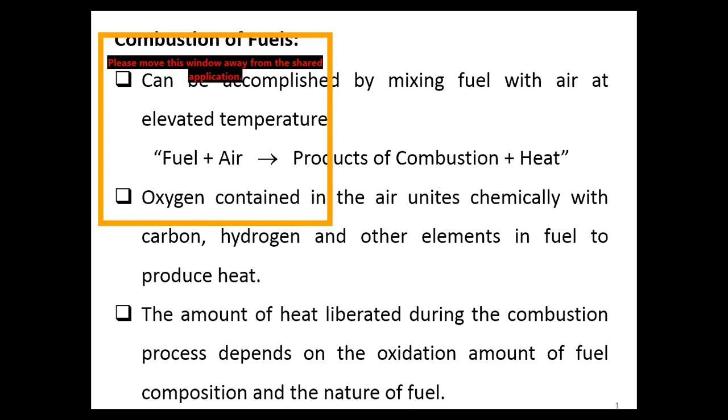You can see the orange frame happen. Okay, stop sharing first, then share it again.

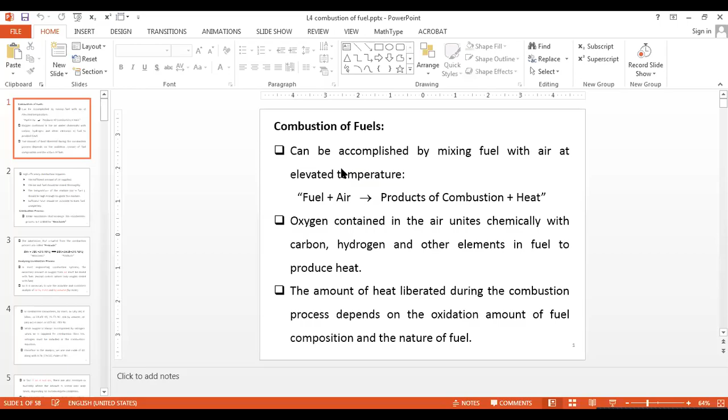Okay, so today we are going to talk about the combustion of fuels, which is the main source of energy for our internal combustion engine. Combustion of the fuel creates the heat for us.

Combustion of fuels can be accomplished by mixing the fuel with the air at high temperatures. So when we have fuels and air both at elevated temperatures, the reaction will happen, and that means we will have the product of combustion and also the heat that comes out. This heat will convert into work for us.

So why does this reaction happen? Because we have oxygens. The oxygen contained in the air will unite chemically or react chemically with the carbons, hydrogens, and other elements in the fuel that we mix with the air. So it produces the heat.

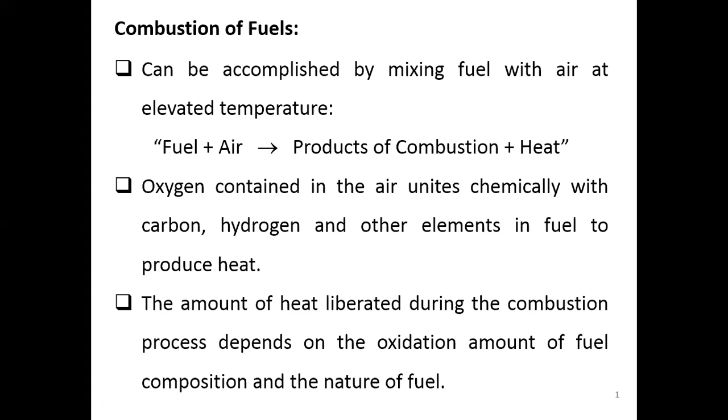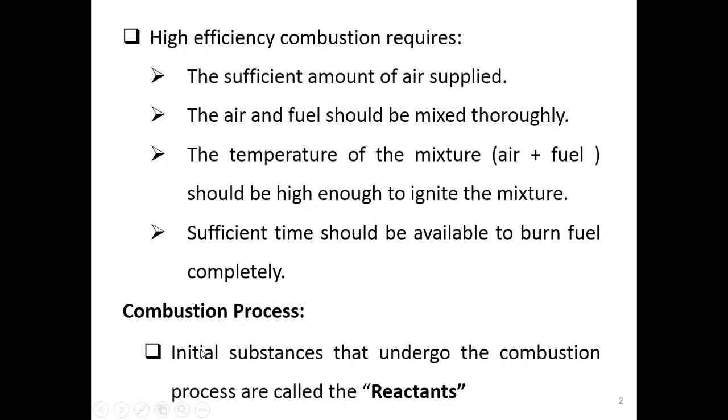Okay, so let's get into the combustion process. Anything that we put into the combustion first, before it goes into the combustion, we call that the reactants. So the initial substances that undergo the combustion are all called reactants. And anything that comes out from the combustion after it finishes, we call it the products.

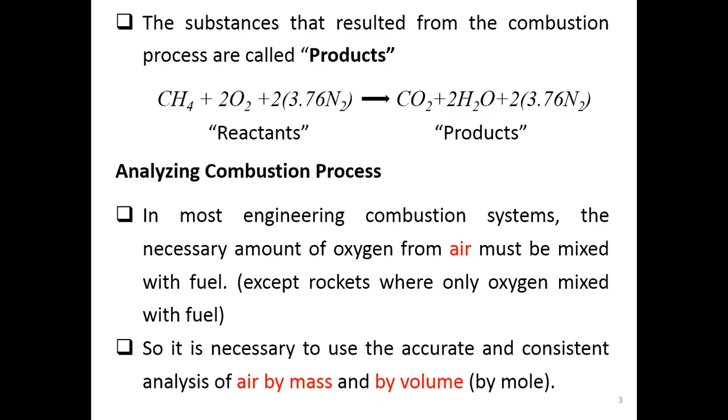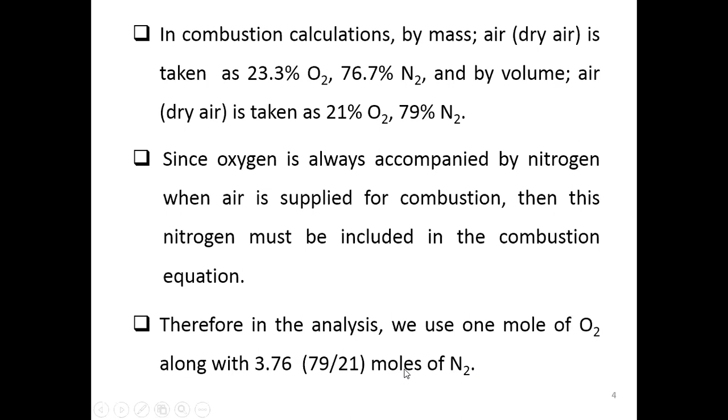Since we bring air into our combustion, not only oxygen do we have to take a look at — since air contains oxygen and nitrogen, we have to take nitrogen into our combustion equation as well, even though we know nitrogen is an inert gas. In the analysis, as already mentioned, 1 mole of oxygen will go along with 3.76 mole of nitrogen, and this represents the air.

We can know the amount of moisture or humidity in the air by using what? Does any student know? In order to get the amount of moisture and humidity in the air, we can use what kind of chart? You learned it in thermodynamics, in the mixtures chapter — what chart can we use in order to get the amount of moisture and humidity? Does any student know?

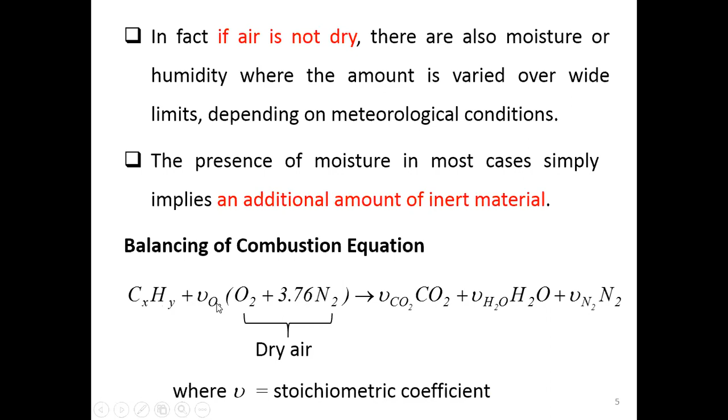Okay, so since we have air and fuel, the air fuel ratio can be expressed on a mass basis or on a mole basis. If it's on the mole basis, it's very simple, because once we finish balancing our combustion equations, we can come up with the air fuel ratio right away, since it's the number of moles of air divided by the number of moles of fuel.

But in terms of mass basis, we have to change from mole to mass, using the equation mass equals mole times molecular mass. So the molecular mass of the air is equal to what? About 29, and you also have to find the molecular mass of the fuel.

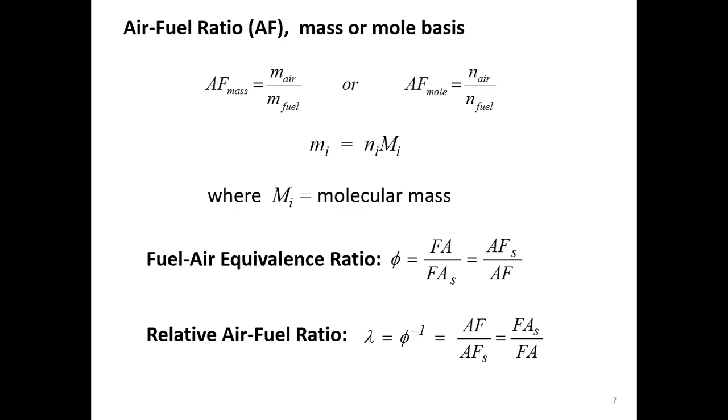We also have another term called the relative air fuel ratio, using lambda, which is 1 over the fuel air equivalent ratio. It depends on which parameter you prefer to use in order to know right away whether the mixture is lean or rich. So if this phi equals 1, it's stoichiometric. If it's less than 1, it's a lean or weak mixture. And if it's greater than 1, it's a rich mixture.

So that is the balancing. We do the balancing of the combustion equation first, and this is the thing we always have to do first. After combustion happens, we have the products of combustion. Outside, people know it by other names, like exhaust gas or flue gas. So exhaust gas and flue gas are products of combustion. We have to do analysis on the products as well, not only on the fuels.

Why? Because from the products that come out, we can know if the combustion that happened is good or bad. To do the analysis on the product, it is usually done by volume or by mole. They're the same thing - by volume, by mole, the result is the same.

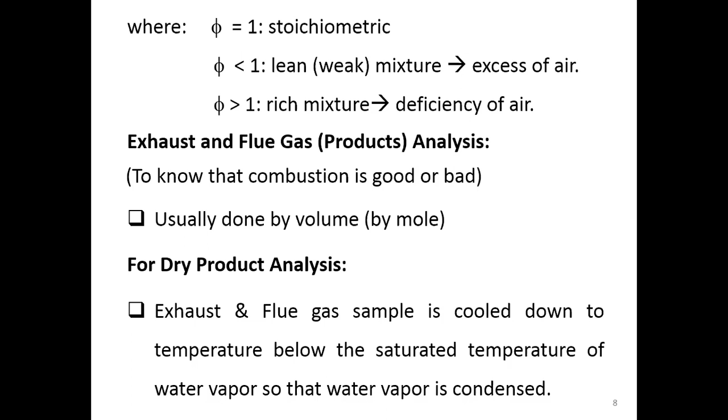But for wet product analysis, we can do it immediately after we take the exhaust sample or flue gas sample. We can do the analysis right away because we don't care whether the water vapor is condensed or not condensed.

Okay, so look at the examples of how we can do the dry products or wet product analysis. Find the stoichiometric air-fuel ratio for the combustion of ethyl alcohol, which is C2H5OH, in a petrol engine or gasoline engine. And after we find the stoichiometric air-fuel ratio, they want us to do what?

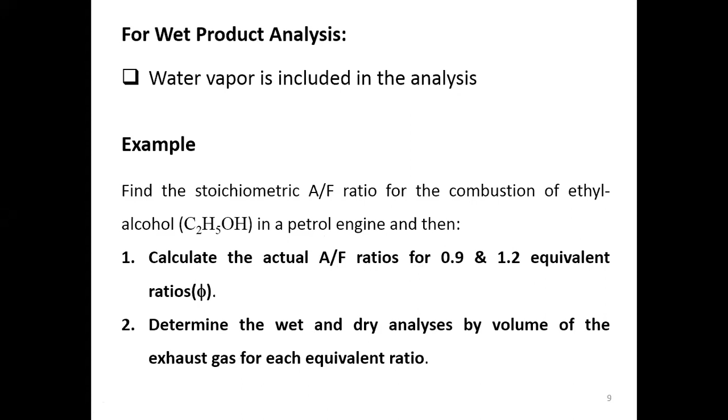Calculate the actual air-fuel ratio. If they use 0.9 and 1.2 equivalence ratio, that means they want us to perform the combustion for the lean mixtures and the rich mixtures. Then after we perform the combustion under lean mixture and rich mixture, they want us to determine the wet and dry analysis by volume of the exhaust gas for each equivalence ratio. So imagine you do the combustion and then do the product analysis.

So let's first do it for the stoichiometric case. We write down the combustion equation of the ethyl alcohol - we have the ethyl alcohol, we have the amount of dry air, and this is the complete combustion. So we do the balancing of all the atoms on the right hand side and the left hand side, and we come up with the stoichiometric coefficients.

So right here - from this we have to read the combustion equation now. After we finish, we have to be able to read the information shown in our combustion equation. From our combustion equation, the first information we get is under 1 mole of the fuel. This is usually how we finish combustion equations.

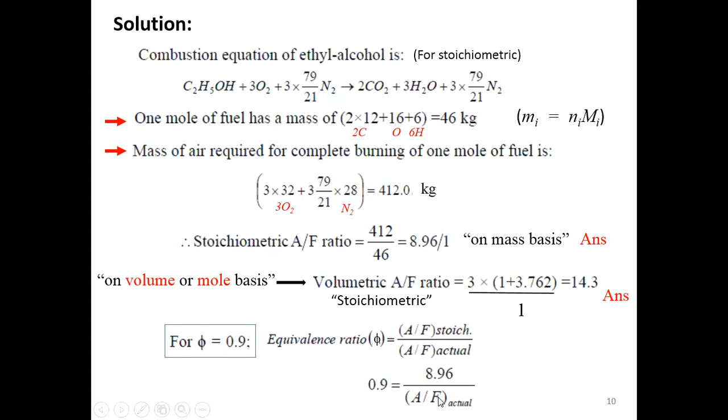If we go for a lean mixture, phi equal to 0.9, the actual air fuel ratio that we use for our lean mixture will be what? 0.9 equal to 8.96, which is on the mass basis here. So the actual air fuel ratio will be 9.95 on the mass basis.

So since we know the amount of the actual air fuel ratio on the mass basis, which is 9.95, then we can perform the wet and dry product analysis. That means we know the air fuel ratio of our mixture, then we can do combustion, and after combustion, we can do wet and dry product analysis.

But first, with the actual air fuel ratio here, we need to find the actual amount of the air that's supplied. Since it is the lean mixture, you expect that the amount of the air should be higher than the amount of the stoichiometric.

It's very easy how you use this phi to come up with the actual amount of the air. So it is 1 over 0.9, which is 1.11 of the amount of the theoretical air. That means the actual air is greater than the theoretical air because you see it's 1.11 here.

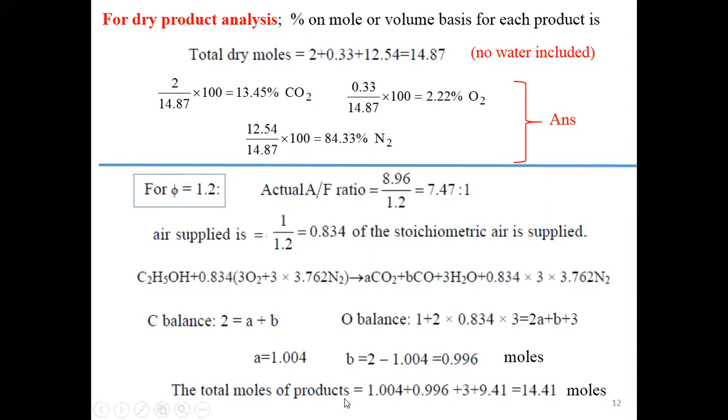And again, after you complete finding all these coefficients here, we don't call this stoichiometric coefficients because it's not stoichiometric, so we just call it the coefficients. So after you get all the value of the coefficients, then you know the total number of mole for the product. And again, you do the wet product analysis the same that we just mentioned before, and also the dry product analysis, same thing.

Okay, any questions in the first example? Any questions? If not, then I go for the second example.

A hydrocarbon fuel of a composition 84.1% by mass of carbon and 15.9% by mass of hydrogen, have a molecular mass or weight of 114.15. Determine the number of mole of the air required for stoichiometric combustion and the number of mole of the products produced per mole of the fuel, and also calculate the air-fuel ratio stoichiometric, fuel-air ratio stoichiometric, and the molecular mass of the reactants and the products. They give you the molecular mass of the air, carbon dioxide, water, nitrogen, oxygen, carbon, and hydrogen.

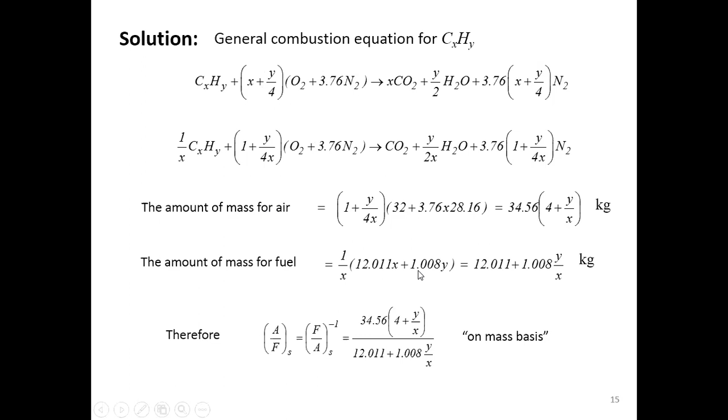Okay, so after we finish this, we are ready. If we know y and x, then we just plug the values of y and x into all of this, because we get used to that. Every time we do a problem on combustion, I have to go with the combustion equation first. So we do it based on our belief, and then now we will work out what is x and y.

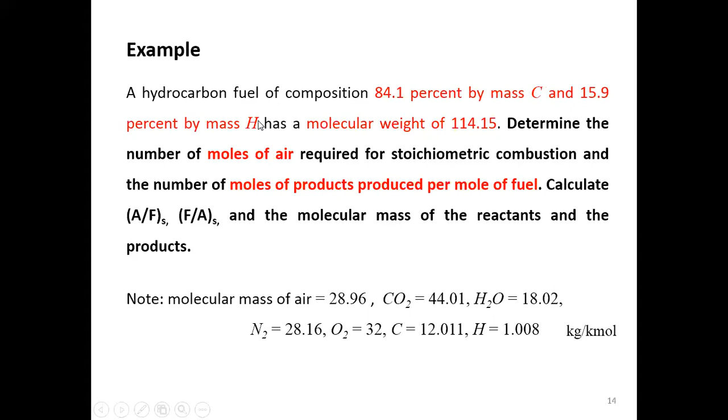Okay, so come back to the information. We have the molecular weight of this fuel equal to 114.15, and this fuel contains carbon and hydrogen. So this molecular weight has to be the sum of the molecular mass of each one. So we have 12 times the number of carbon atoms here, and this is the molecular mass of hydrogen times y here. So this is the first equation because it's 1 mole. This is the first equation that shows us the relation between x and y.

And then we use the second information: we have 84.1% of carbon and 15.9% of hydrogen, by mass. In terms of mole, the hydrogen over carbon in terms of mole is y over x. So it is mass divided by molecular mass. Hydrogen is 15.9% by mass divided by 1.008, which is the molecular mass. Then it's going to be percent of mole. Same as the carbon down here. So we have y over x equal to this.

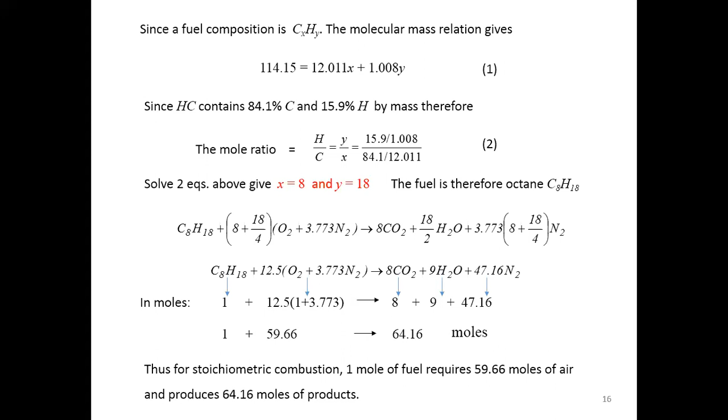So in terms of mass, the mass of the reactants have to be equal to the mass of the product. So this is how you can recheck that your combustion equation is correct or not. Why does the mass of the reactant have to equal the mass of the product? It's because of the conservation of mass. We don't have conservation of mole, so the number of mole on the reactants doesn't need to be equal to the number of mole on the products, but for mass it has to be the same. So this is one way that you can check that your balance is correct or not.

So per unit mass fuel, if we want to get in terms of per unit mass fuel, we divide the whole equation by 114.15, and the result is we have 1 kilogram of fuel requires 15.14 kilogram of the air. And the total mass of the product will be 16.14. And the stoichiometric air fuel ratio will be 15.14, on mass basis.

How about the molecular mass of the reactants and the molecular mass of the product? It's just the summation, because we have more than one reactant and more than one product. So what are the reactants we have? We have the mass of the fuel and the mass of the air, divided by the total number of mole of the reactants. Then the molecular mass of the whole reactants as one will be 30.36.

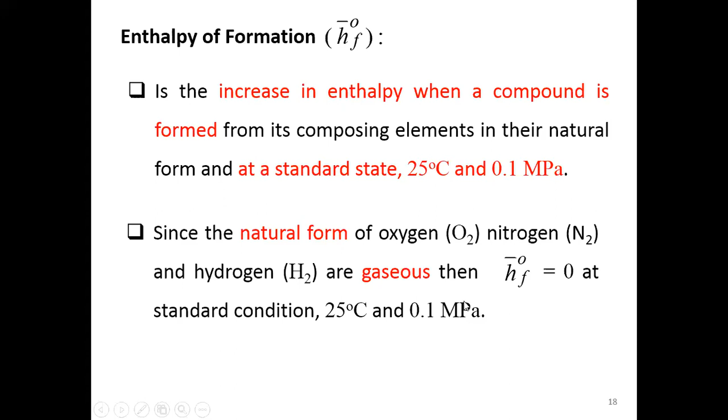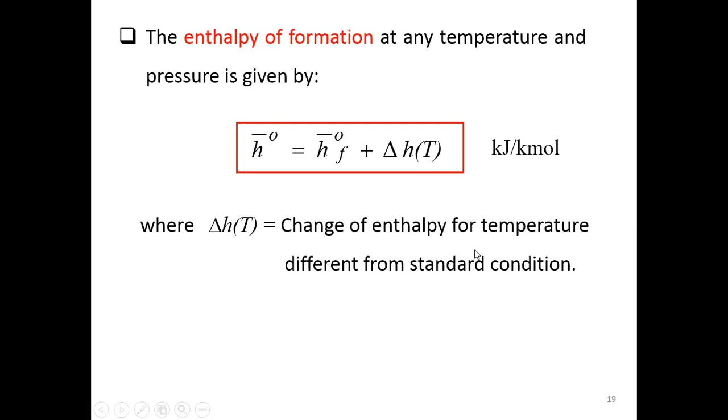How about the enthalpy of formation that is not at the standard conditions? We can find it by using this equation: the enthalpy of formation of itself at the standard condition, plus the change of enthalpy at any temperature that is different from the standard conditions. If you remember in thermodynamics, we have table A.9 that talks about the enthalpy of formation at standard conditions and the change of enthalpy at different temperatures apart from the standard conditions.

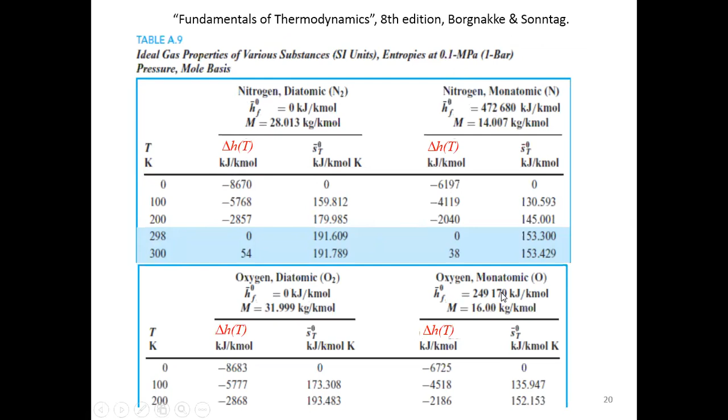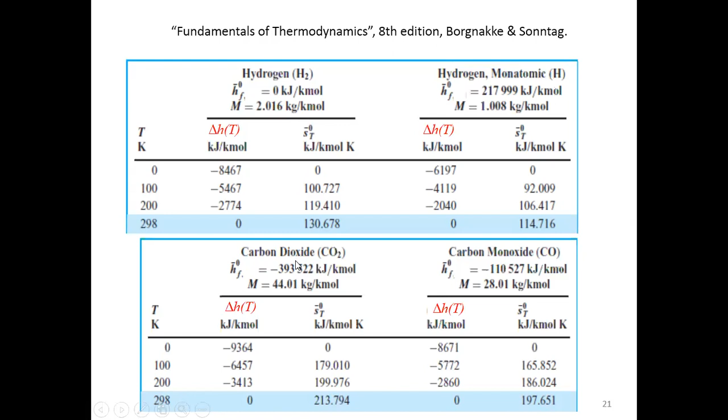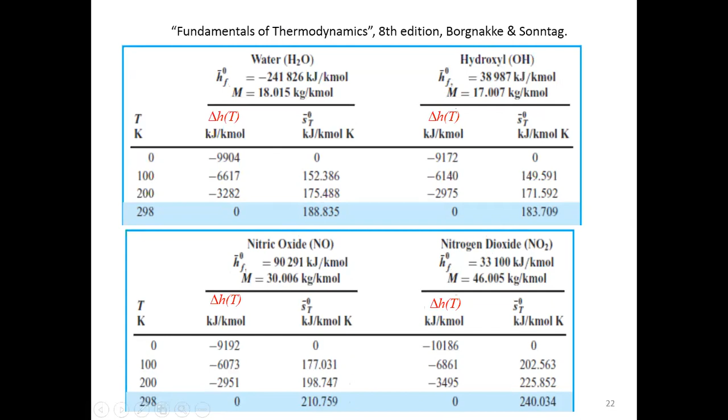We have for nitrogen, diatomic and monoatomic. Oxygen for both diatomic and monoatomic. Also hydrogen, for both diatomic and monoatomic. We also have carbon dioxide, carbon monoxide, water, nitric oxide, nitrogen dioxide, or hydroxyl. All this you can find from table A.9.

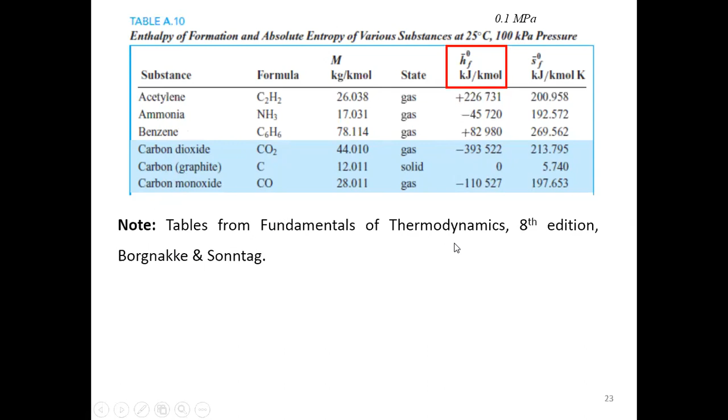In table A.10, they only show you the enthalpy of formation at standard condition, 25 degrees Celsius, 100 kPa. So in table A.10 you will find the information on the enthalpy of formation for different substances - a lot more than this, I just showed you some examples here. All of this you can get from the fundamentals of thermodynamics, the textbook that you use when you learn thermodynamics.

Since we know the enthalpy of formations, let's get back to our combustion. Because the way we do combustion, we make a compound happen. So to do the analysis, we have to come back to our first law. So we start with the first law for the steady state process.

We start with this because this is the good start before we get into our real combustion in our internal combustion engines.

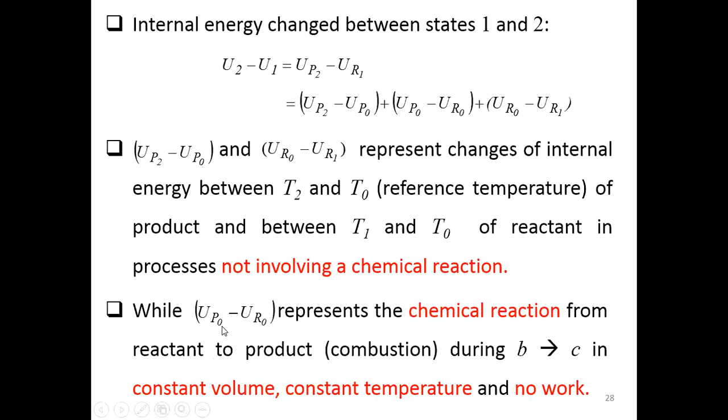So UP0 and UR0 represent the chemical reaction from reactants to product during B to C. This is at constant volume, constant temperature, because 0 and 0 here, and no work.

So we will define this middle term, delta U0, which is UP0 minus UR0. Call it the internal energy of combustion at T0.

So overall, now we have UP2 minus UR1 equal to UP2 minus UP0 plus delta U0 plus UR0 minus UR1. Where these two terms here, we can find from our knowledge in thermodynamics.

UP2 minus UP0 equal to what? Summation of the mass of the product - how many products you have - times the specific heat at constant volume, times the change of temperature. Or if you want more accurate results, use the property called internal energy of each product at T2 minus the internal energy of that product at T0.

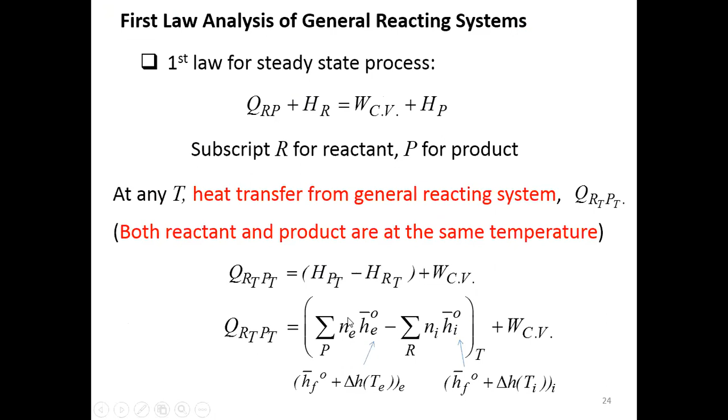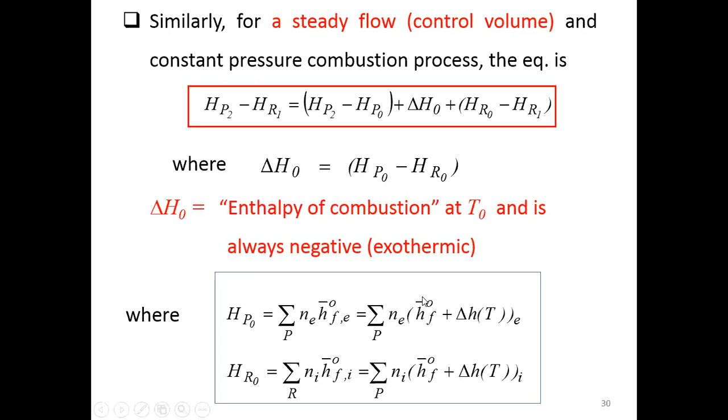Refer to this term, which we can find from the table of enthalpy of formations, right? So these two terms we can get from the table of enthalpy of formations. So now, okay, and the other two terms, right?

The other two terms we can get from the mass times the specific heat at constant pressure times the temperatures, right? Or if we want a more accurate result, we can use the enthalpy table, not the table of enthalpy of formation, because no new material is formed — the same material remains. So this is just enthalpy.

Same as the reactant here. Reactant and reactant, no new material comes out from the process, right? So this is just the enthalpy due to the change of condition, not because a new compound comes up. No, okay.

So now we have the internal energy of combustion and the enthalpy of combustion. How do we relate these two together? Because we only have the table for enthalpy of formations, we don't have a table for internal energy of formations, never have. So how can we relate these two so we can get the value for internal energy of combustion here?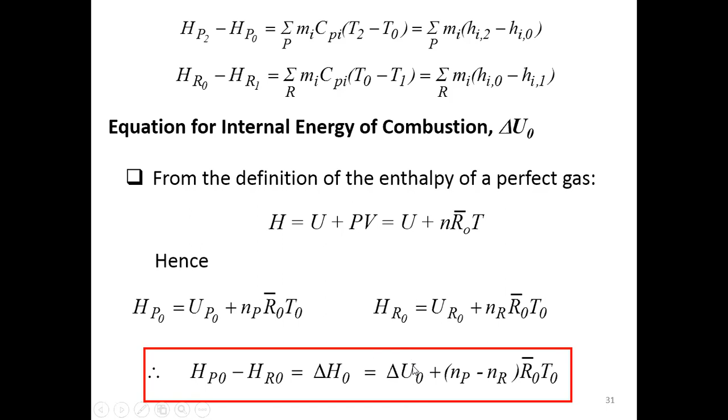H, the enthalpy of the product at T0, will be equal to the internal energy of the product at T0 plus the number of moles for the product times the universal gas constant times T0. Same for the enthalpy of the reactants. So now we can come up with the equation that relates the enthalpy of combustion and the internal energy of combustion, so we can use the table of enthalpy of formations to find the internal energy of combustion here, okay?

So from this equation you can see that if there is no change in the number of moles during the reaction — that means the number of moles for the reactants and the number of moles for the product are the same — that's one condition. Or if the reference temperature T0 is absolute zero, meaning we perform the reaction at absolute zero temperature — under either of these two conditions, you will find that the internal energy of combustion will be equal to the enthalpy of combustion.

Okay, so let's look at the example. Calculate the internal energy of combustion, delta U0, in kilojoules per kilogram for the combustion of benzene, C6H6 vapor, which reacts in a constant bomb at 25 degrees Celsius standard condition with oxygen, and the product, water H2O, is in the vapor phase. The constant bomb is a device where we perform combustion under constant volume — it's a closed vessel used to perform the combustion.

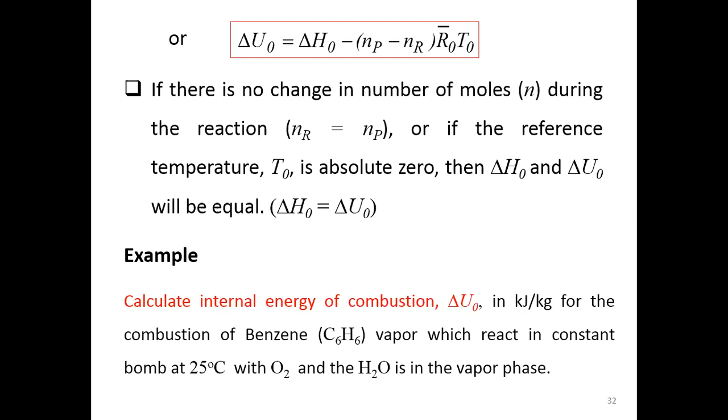So again, even though we come up with the new term internal energy of combustion, we still have to rely back on our basic combustion equation. We have C6H6 reacting with oxygen, and the product comes out as CO2 and water.

So we do balancing the equation. We find out the number of mole of the reactant will be 8.5. The number of mole for the product is 9, right?

So to find the internal energy of combustions, we make use of this equation. Our T0 becomes the standard temperature condition, 25 degrees Celsius, right? So now, in order to come up with the internal energy of combustions, we already know the enthalpy of combustion here from our previous example, right?

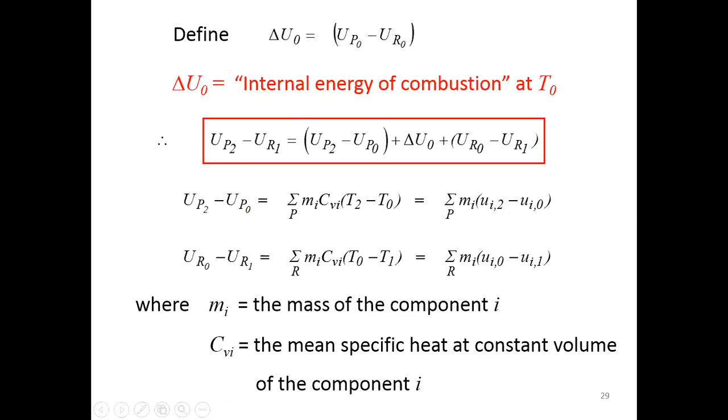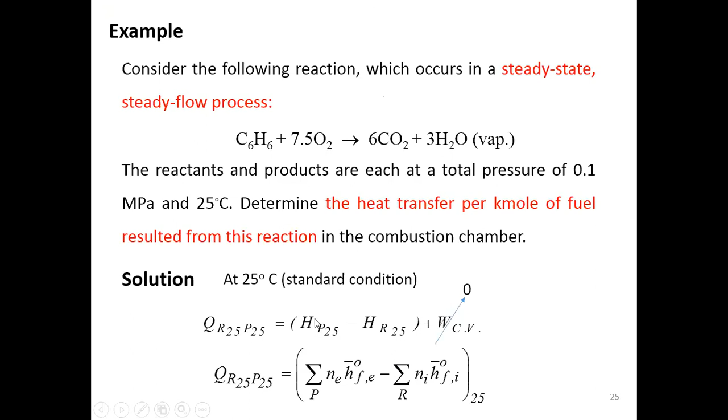We talk in terms of the heat that transfers out. Same thing, right? If you remember, it depends on which one you would like to talk about. If you talk on this side, you say heat transfer. If you talk on this side, you say the change of the enthalpy.

Okay, so in here, we talk about the enthalpy of combustion, or the change of the enthalpy, when the material changes from reactant to product under the same conditions. So this is the meaning of the enthalpy of combustions, as well as the internal energy of combustion. We're talking about the change of the enthalpy when the condition is the same, but the material changes from one substance to another substance.

So in terms of enthalpy, it becomes the enthalpy of formation because it forms a new substance. So from the previous example, we already have the heat transfer, which is equal to the enthalpy of combustion, or the change of the enthalpy under the same conditions, only the material changes. Okay, so this is the amount we have, right?

So the internal energy of combustions can be found from this, on the mole basis, because it's kilojoule per kilomole. So on the mass basis, we just change mole into mass using the molecular mass. So it is 40,000 something kilojoule per kilogram of the fuel, right?

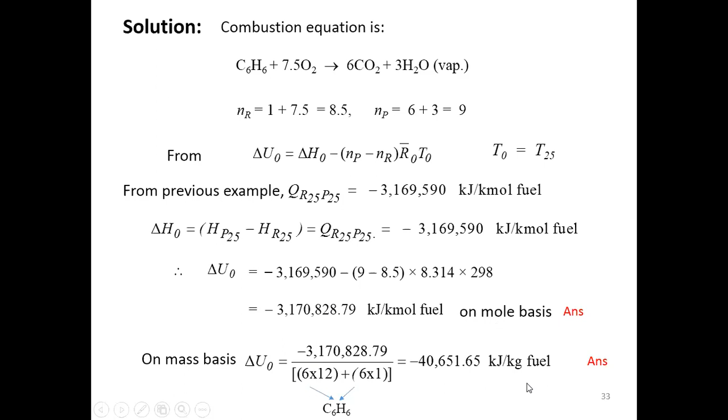So in here, I think everybody understands the meaning of internal energy of combustions and enthalpy of combustions.

Another example: calculate the enthalpy of the products and the reactants, and the enthalpy and internal energy of combustions of the stoichiometric mixtures of methane and oxygen at 298.15 Kelvin, which is the standard conditions. Okay, so our stoichiometric reaction is this. This is our methane.

Methane and oxygen react together. Balancing the equation, this is what we get. Okay, so go to the solutions.

The enthalpy of the reactants at 25 degrees Celsius is what? This is methane, oxygen is 0, right? So we get it from table A.10, the enthalpy of formation at standard conditions, times with the number of mole for the methane. For the products, if we consider that this water shown right here is a vapor...

So the enthalpy of the product at standard conditions consists of what? The enthalpy of formation at standard condition for the CO2, plus the enthalpy of formation at standard condition for the water as a vapor. Both of these we can get from table A.10.

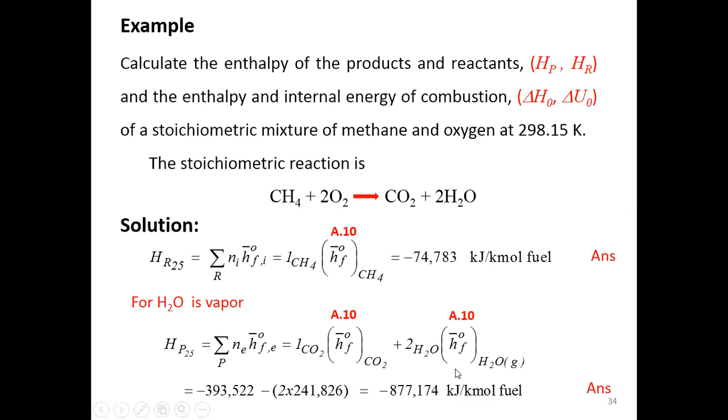If it is a liquid, then for this water, the enthalpy of formation for the water has to be looked up when it is in terms of liquid. It's also shown in table A.10. So you see two enthalpy of formation values at the standard conditions for water, two of them here in table A.10. It depends on whether you look at the water as a liquid or as a gas.

Okay, so we have the enthalpy of the product finished. Now calculate the enthalpy of combustions.

So if the water is vapor, the enthalpy of combustion at the standard condition will be the enthalpy of the products minus the enthalpy of the reactant at the same standard condition. This is the meaning of enthalpy of combustions. The material changes, the condition is the same. Okay, so this is what we have.

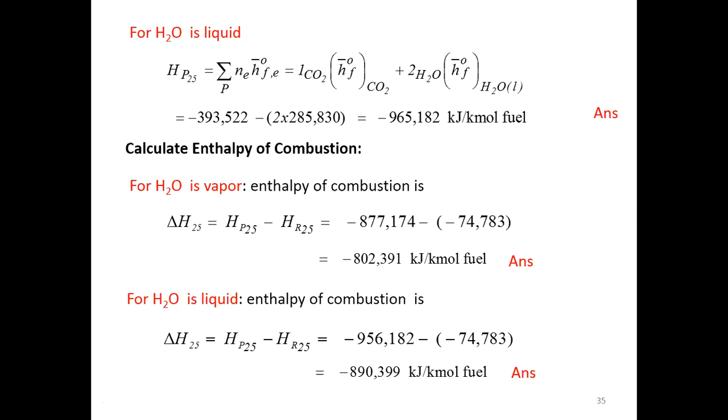If water is vapor, if water is liquid, we get a different value. You can notice that if we let the water condense as a liquid in our bomb, the amount of the enthalpy of combustion is higher than the amount we get when our water is in the vapor phase.

Okay, how about calculating the internal energy of combustion? Back to our combustion equations and our equation that relates the enthalpy of combustion to the internal energy of combustion. We have the number of moles shown right here.

If our water is vapor, the number of moles of the reactants will be 1 for fuel, 2 for oxygen. How about the number of products? We have 1 carbon dioxide plus 2 water, so it's 3 equal to 3. So the number of reactants equals the number of products.

So that means when our water is a vapor, we have the internal energy of combustion equal to the enthalpy of combustion. But when our water is a liquid, the number of products now reduces to just 1, because we don't have water as a gas or vapor. So the internal energy of combustion now will be different from the enthalpy of combustion, by this amount.

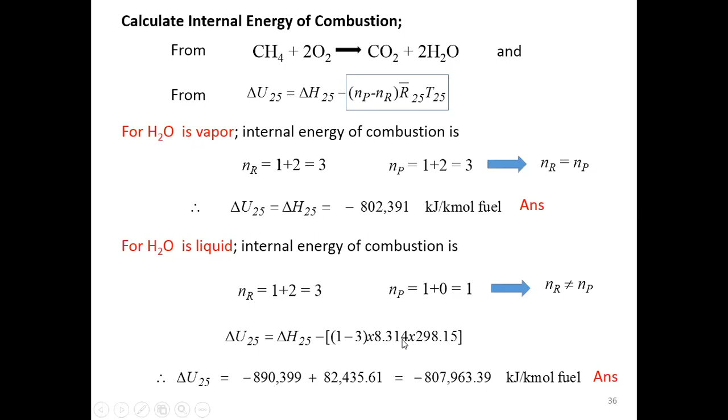Okay, so we will take a 10-minute break here. Any questions?

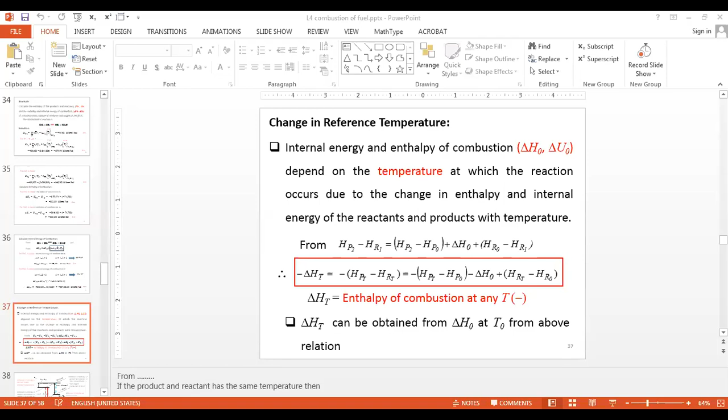Okay, we get back to our lectures. I think everybody is ready. I cannot move my slide again. Stop share. Okay, let's get back to our business after the break.

Okay, we talked about reference temperatures, the standard conditions with 25 degrees Celsius. We talked about the internal energy of combustion and the enthalpy of combustion, and we use T0 as the reference temperature.

Now, if we want to change the reference temperature, how can we find the internal energy and enthalpy of combustion at a temperature apart from the reference or standard condition temperature? The internal energy and enthalpy of combustion depend on the temperature at which the reaction occurs, due to the change in enthalpy and internal energy of the reactant and product with temperature. So it changes depending on the temperature.

So from our equation that involves the internal energy and enthalpy of combustion right here, this is the change of enthalpy from products to reactants at different conditions. We call this the enthalpy of combustion at any temperature, and we put a minus sign here.

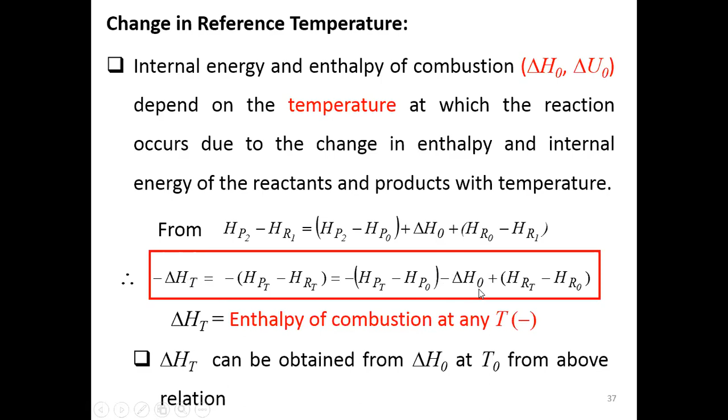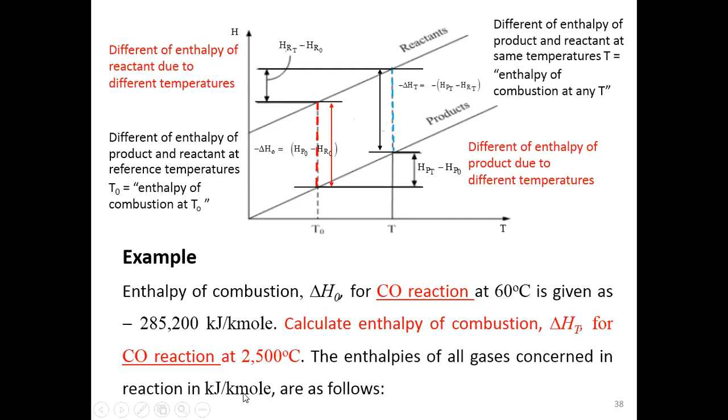For CO reaction, we have to write down the reaction equation. CO plus half mole of oxygen becomes CO2. This is the reaction that happened. So from our equation to find the enthalpy of combustion at any temperature, we can get it from all these three expressions summed together. At temperature equal to 60, which is 0 here.

The enthalpy of reactant at 60 degrees Celsius will be what? 1 mole of carbon monoxide plus half mole of oxygen. The enthalpy, get it from this table. So this is the reactant, the enthalpy of reactant at 60 degrees Celsius.

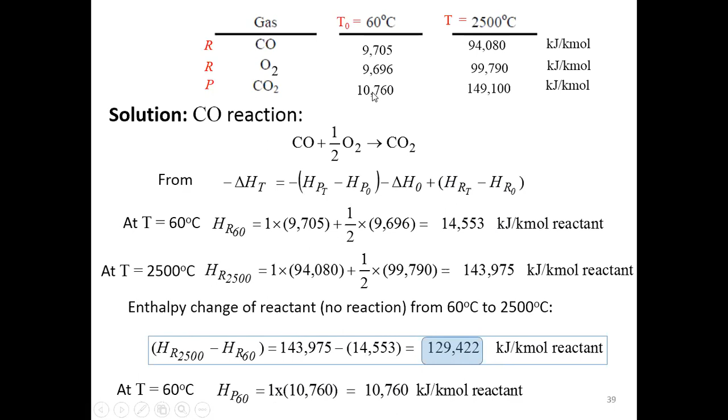We keep this number here, and then we work the same for the products. The product at 60, we have only one product, CO2, the enthalpy shown right here, and then we have the product at 2500 degrees Celsius. So the change of the product is as if there's no reaction because the product is the same - only the condition changes.

With the given enthalpy of combustion for CO reaction at 60 degrees Celsius, given like this, the enthalpy of combustion for CO reaction at 2500 degrees Celsius will be this. So the same reaction, but with different temperature, you get a different enthalpy of combustion.

This goes back to our basic knowledge. Fuel and air react together at elevated temperature. What is that elevated temperature? What are the effects of elevated temperature on the results of combustion? At different elevated temperatures, you get different amounts of heat. We call this enthalpy of combustion or internal energy of combustion. For the same fuel, the same amount of mass, the same thing, you only change the temperature, and you get different results.

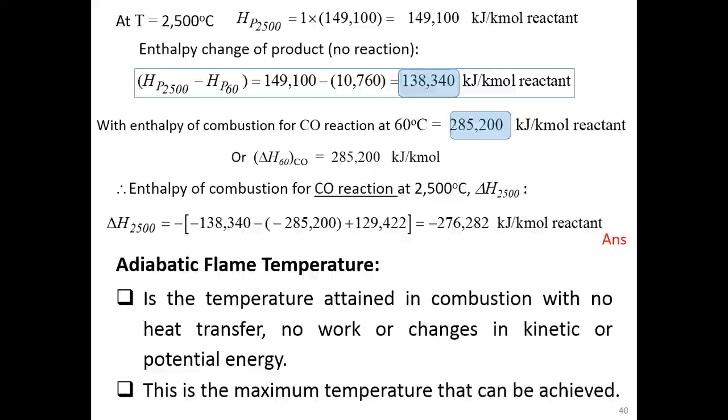This adiabatic temperature can be achieved with the stoichiometric mixture when complete combustion occurs. So apart from letting no heat, no work, no change, our combustion has to be complete combustion under stoichiometric mixtures.

Okay, so examples to find the adiabatic flame temperature. Liquid heptane, C7H16, had an enthalpy of combustion at 25 degrees Celsius, standard temperature, equal to 44,560 kilojoules per kilogram, when the water in the product is in the vapor phase. So this is the amount when the water is still in the vapor phase.

This fuel is to burn adiabatically, no heat transfer, in a steady stream of air, in stoichiometric proportions. Now, if the initial temperature of the fuel and air is 15 degrees Celsius, so the reactant is at 15 degrees Celsius, estimate the temperature of the products. What is the temperature of the product here?

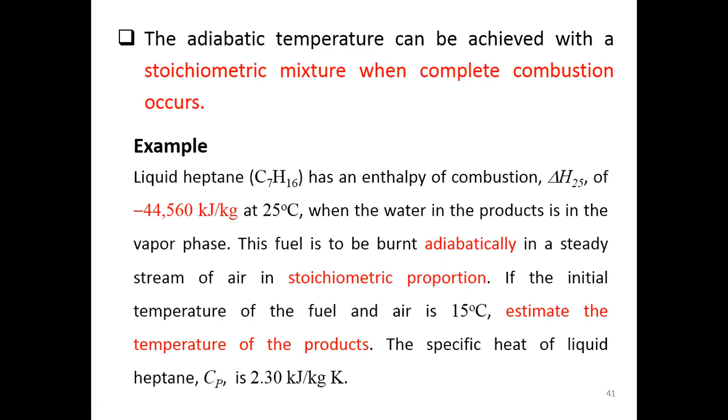The specific heat of the liquid heptane, which is the fuel, at constant pressure is 2.30 kilojoule per kilogram kelvin. They give us the specific heat at constant pressure because it burns under a steady stream of air. So it burns as the air keeps flowing in and out continuously.

Okay, so the specific heat has to be the specific heat at constant pressure. Again, come back to our belief: we have to start with the combustion equations always. So we have C7H16, we react it with the air, and we come up with complete combustion. This is the result from balancing the combustion equation. This is the first thing that we have to do.

Then the first law for the steady flow: no heat, no work. The result is that the enthalpy of the products equals the enthalpy of the reactants. This is the result we get under this burning or combustion condition. In other words, the enthalpy of the product at the temperature we are looking for, minus the enthalpy of the reactant at the initial temperature 15, has to equal 0.

So from this equation we expand it because we want to find the temperature here. We expand this to be the same picture as we mentioned. We have the enthalpy change of the products from the final temperature to the standard temperature of 25, plus the enthalpy of combustion at standard temperature 25, plus the change of enthalpy of the reactants from standard temperature 25 to initial temperature 15.

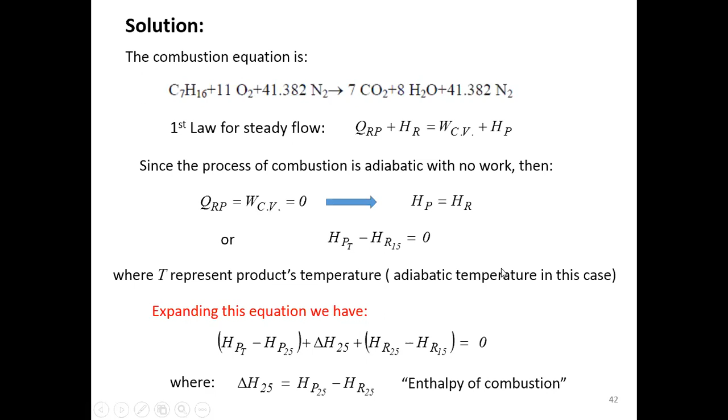So here we first assume that the temperature is 1800 Kelvin for the first estimation. From the tables you can get the enthalpy of CO2, the enthalpy of water - the first one is at 1800 Kelvin, the second one is at 25 degrees Celsius. You get it from table A.8. So you have the products: CO2, water, nitrogen. You sum it up - this is the number you get from your first estimation.

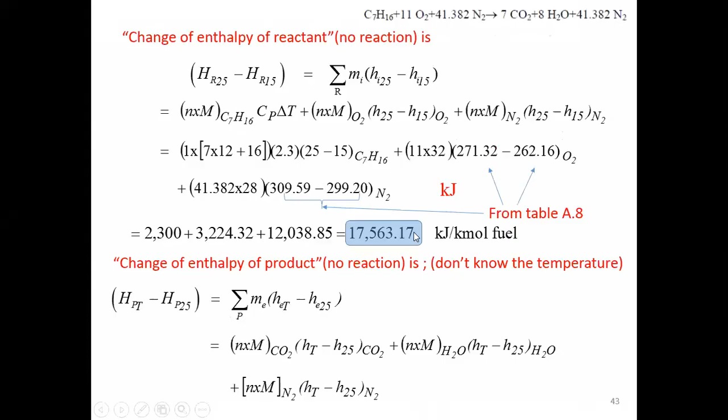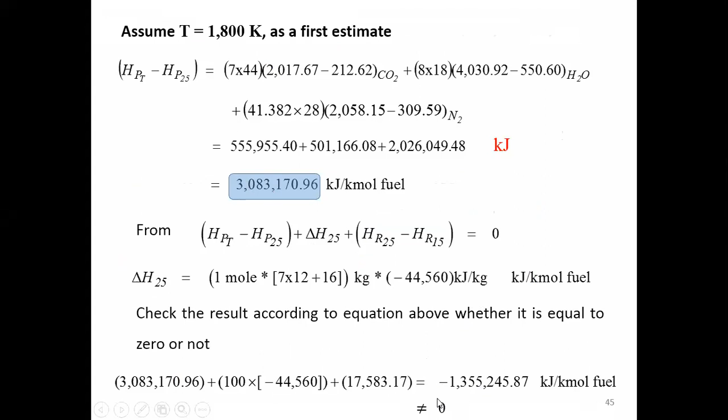So this term you get from here, and this term you get from here, and this term you get from here. So the overall result is minus, not equal to 0. So you do the second assuming, go for a higher temperature, 2000. You do the same thing, you get a smaller minus sign. So that means you are now in a good direction, a correct direction.

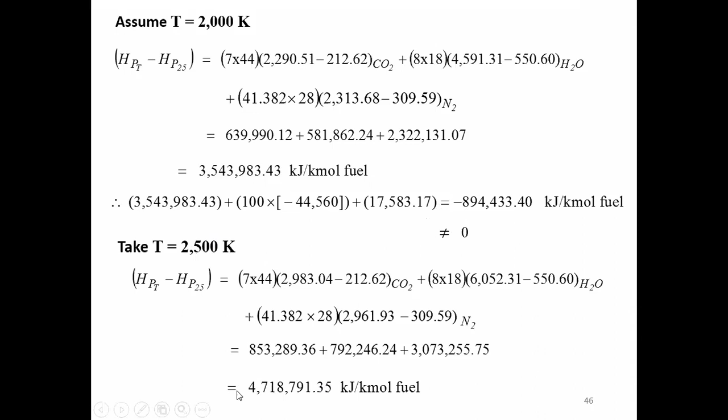Because you're negative while getting reduced, that means you are traveling closer and closer to 0. So you do another one - go for a much higher temperature, 2500 Kelvin. This is what you get, a plus sign. That's it - only 3 assuming temperatures. You get this amount, not that amount.

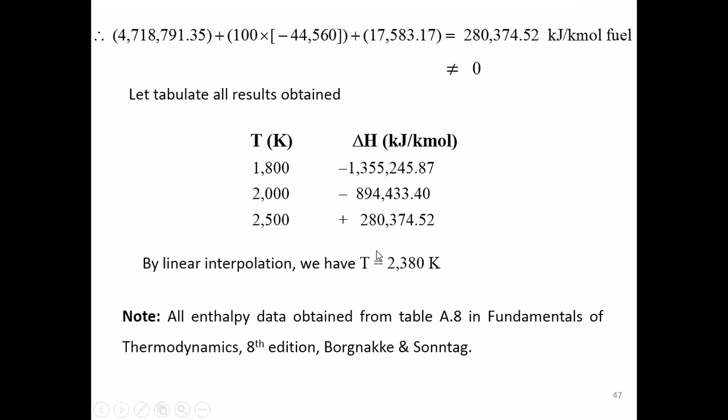This is the result - you get this amount, a plus sign shown right here. So with all these 3 points, you make a plot, or do a linear interpolation. You come up with this temperature. Either way, you make a plot or do linear interpolation because it's linear, and you get the result temperature, which is the adiabatic temperature.

Everything we learn about internal energy of combustion and enthalpy of combustion in this class, when you go outside, people don't call it that. What they say is calorific value or heating value of fuels. So in fuel specifications, the quantities delta H0 and delta U0, the internal energy and enthalpy of combustion, are approximated by a quantity called the calorific value or heating value.

It's called approximate because we calculate it theoretically, but the real calorific value or heating value is normally obtained by performing an actual combustion of the fuel in a constant volume type apparatus, called a bomb calorimeter, or a constant pressure steady flow type apparatus, called a Boy's calorimeter. So they are equivalent, but not equal, for internal energy and enthalpy of combustion.

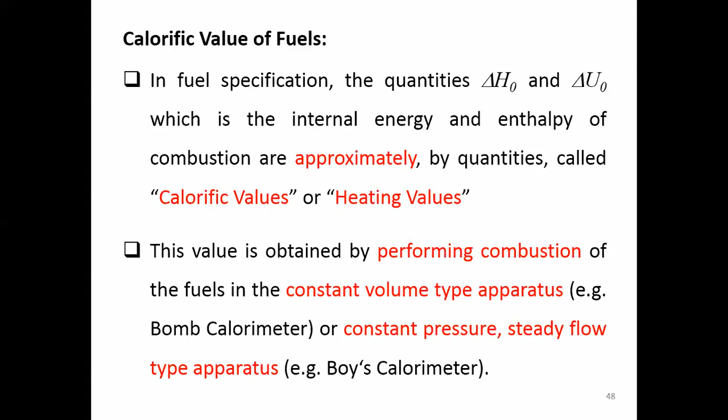When we talk about calorific value or heating value, they are equivalent, but in terms of quantity, they are not the same. Because outside, if they want to find the heating value, they just take the fuel and perform the combustion inside the apparatus, either a bomb calorimeter or Boy's calorimeter.

This picture shows the bomb calorimeter, in which we have a closed vessel, capped so it becomes a closed system at constant volume. We have another vessel outside filled with water. Our fuel sample is put in the crucible, a small vessel, and we ignite this fuel using a fuse connected via the electrode. Inside we fill with oxygen through the oxygen inlet valve.

So we perform a combustion. After combustion happens, the heat transfers out to the water. We measure the temperature of the water using this thermometer before and after, so we can calculate the amount of heat transferred out, which is the calorific value or heating value practically, or internal energy of combustion theoretically, by using the mass of the water times the specific heat of water times the temperature difference. Because the mass receives all the heat, everything is insulated, no heat transfers to outside.

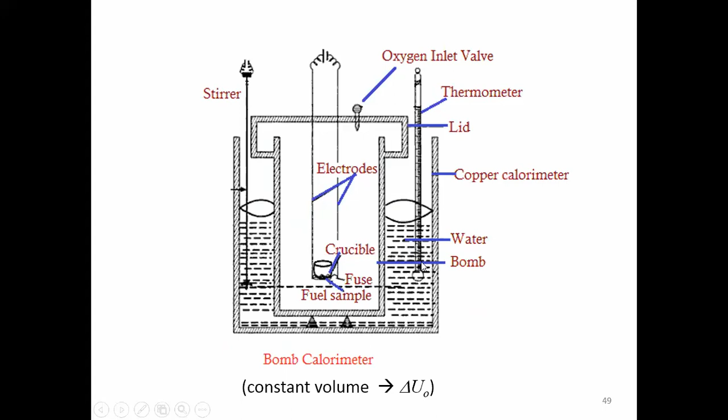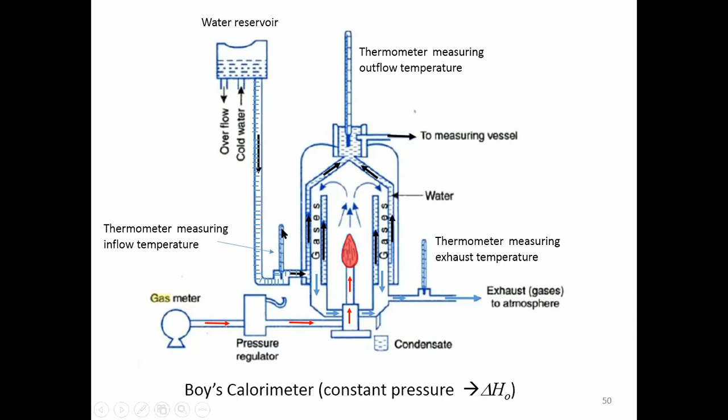Then we have water surrounding these vessels. We let the water flow in and out. For the bomb calorimeter, the water doesn't flow in and out, it stays in, we have the same amount of water. But here, we let the water flow in and then out after it receives the heat. So we measure the temperature of the water before getting into the calorimeter, and then when it flows out. Again, we multiply by the mass flow rate of the water times the specific heat of the water, so we get the heating value or calorific value, which is equivalent to the enthalpy of combustion, because this is under a steady state process.

To do that, as already mentioned, we can wait until the water from the combustion condenses and becomes liquid. So we have two values for the calorific value. The first is called the higher or gross calorific value, at constant volume. Theoretically, the gross calorific value at constant volume equals the internal energy of combustion at reference temperature, if we do it at 25 degrees Celsius, the standard one. That means to get the gross value, the water products have to be in the liquid phase, so we wait until the temperature goes down below the saturated temperature at 25 degrees Celsius, knowing the pressure inside that makes the reference temperature fall below the saturated temperature, so you can be sure the water vapor in the exhaust will condense to liquid.

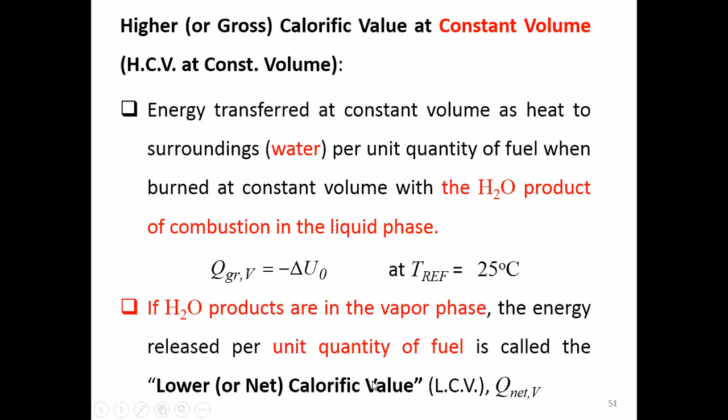If you let this water product stay in the vapor phase, then the calorific value you get is called the lower or net calorific value. Same thing for constant pressure: you have a higher calorific value at constant pressure, and you also have the lower or net calorific value at constant pressure. Same thing, you let the water condense, or you let the water stay in the vapor phase.

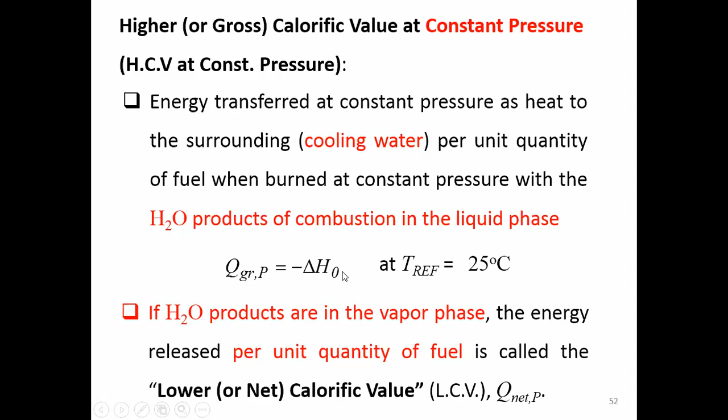Okay, so that means what? The difference between the gross and the net, right? It depends on the heat that changes the water from vapor to liquid. We can use this to create the equation that relates the gross calorific value to the net calorific value for both constant volume and constant pressure.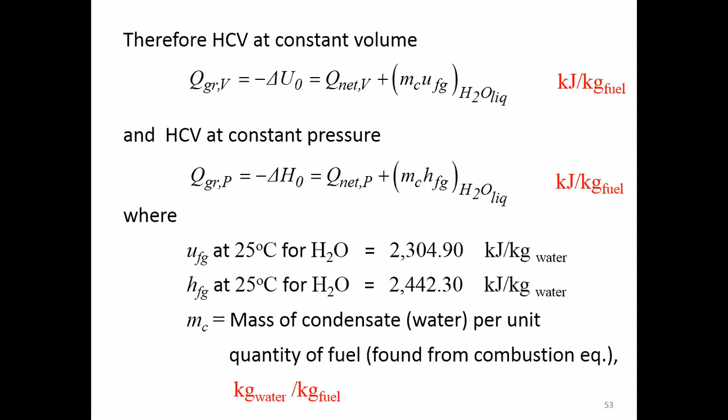For constant volume, this is the amount of heat released when water becomes liquid - we use UFG, I think everybody still remembers UFG, right? And for constant pressure we use HFG, when water is in liquid. I give you here the value for UFG at 25 degrees Celsius and HFG at 25 degrees Celsius. And MC is the mass of the condensed water per unit quantity of fuel.

Example: the gross calorific value at constant volume of kerosene - in Thai we call it น้ำมันก๊าซ - kerosene C7H14, whose ultimate analysis gives us 86% carbon and 14% hydrogen. The gross calorific value of this fuel was found by experiment, meaning they did a real combustion, and got a value equal to 46,000 something kilojoule per kilogram. This is done under constant volume.

They want to use this calorific value information to find the other three calorific values: the net at constant volume, and the gross and net at constant pressure. So again, even with this problem, we still have to start with what? Combustion equations, right?

C7H14 reacts with oxygen, because this was done by experiment, and in our experiment we only use oxygen. So oxygen is the only reactant here. They complete the balancing of the combustion equation. This is the result: CO2 and water.

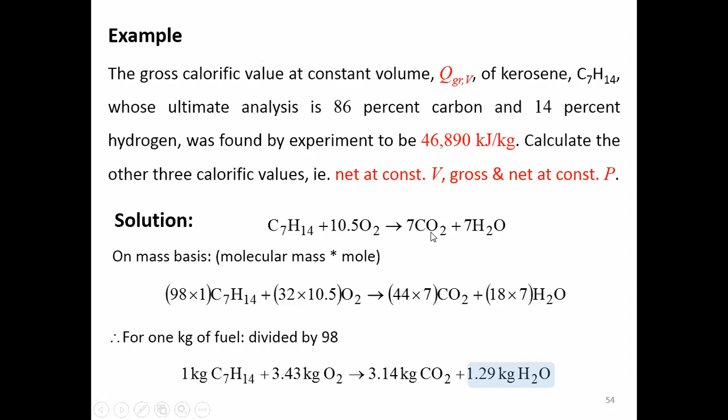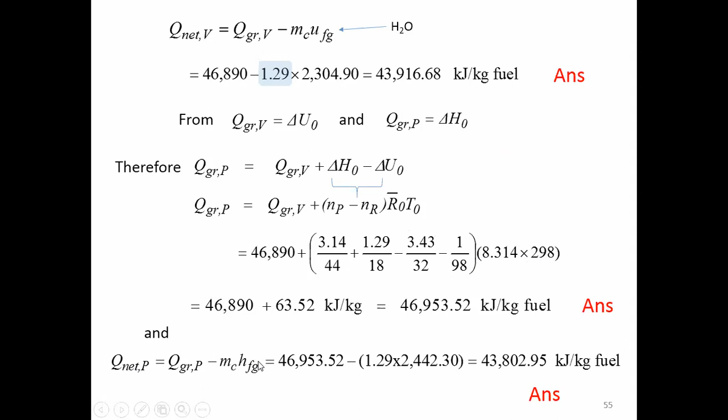Or you can use this one, which is the same because this shows you in mole already. Either one can use. And then you time with the universal gas constant, time with the temperature, then you get the gross calorific value at constant pressure. And then the net calorific value at constant pressure can be found from the HFG here. So this is how we can come up with only one piece of information given and find the last three. I think this is almost near the last.

Combustion efficiency of internal combustion engines. In general, the exhaust gas of the internal combustion engine contains incomplete combustion products. This is what happened, generally, when you do the exhaust gas analysis.

And that means incomplete combustion products are that you have CO, you have hydrogen come out. You also have unburned hydrocarbon, or hydrocarbon left over, and you have soot that comes out. Soot is a particle, a big size particle, we call it soot. As well as complete combustion products, which are CO2 and water. So the exhaust gas comes out with both incomplete combustion products and complete combustion products.

So under lean operating conditions, that means if you're using a lean mixture, the amount of incomplete combustion products are small. But for the rich mixture, this amount becomes more substantial, that means no longer small.

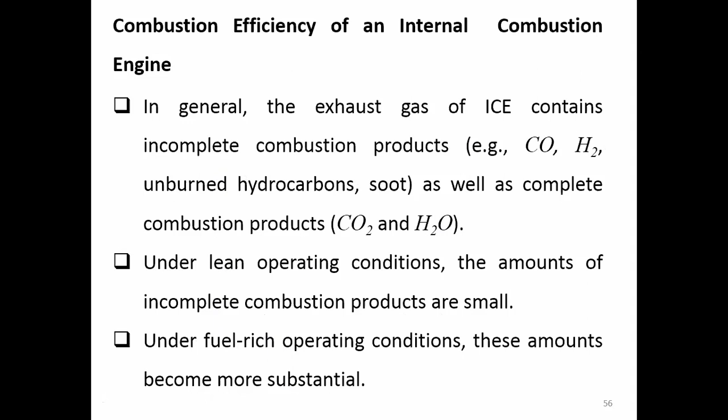So why for rich mixture does the amount of incomplete combustion get more substantial? Because there is not enough oxygen to perform complete combustion. So that means you don't have enough oxygen to react with the fuel. So not all of the fuel chemical energy can be released inside the engine during the combustion process. This is the fact.

So that means we have to have a combustion efficiency to see how good we do the combustion. And the combustion efficiency comes out from the enthalpy of combustion, at any temperature, divided by the amount of heat that we provide to the combustion.

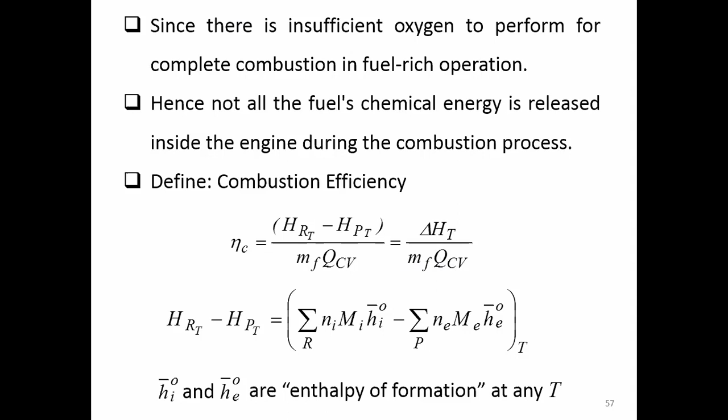QCV represents the calorific value or the heating value, and the mass of the fuel. So this is how the combustion efficiency comes up.

But for the CI engine, usually we go for lean, if you remember when we talk about air fuel ratio. So for CI engine, since it always goes for lean, the combustion efficiency is normally high.